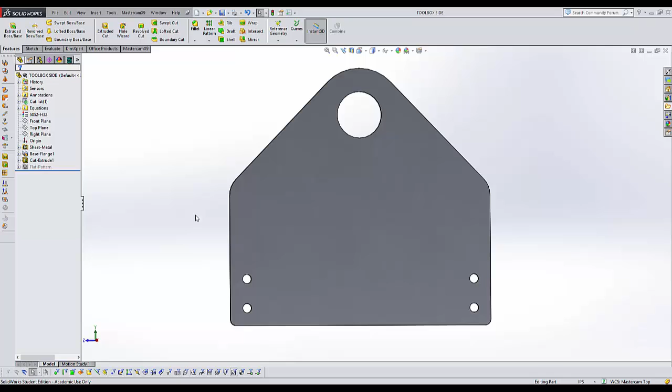Now that we're done with the side, let's begin the toolbox base. Let's start by choosing New, Part, OK.

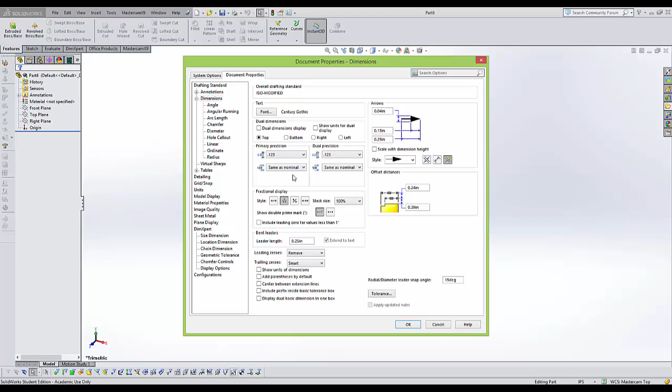We can set up our options, documents, dimensions, leading zeros - remove those. Primary precision, we want them to 3 decimal places. We want our linear dimensions to be in between. We want to make sure our units are set to inch pounds, and we'll hit OK there.

We're going to start doing sheet metal. We're going to choose the top plane, and we're going to create a rectangle. So far we learned how to create lines, arcs, and now we're doing the rectangle command.

We'll choose it off the center. We'll grab the origin, expand that. As you can see, as I use that one, it's already created some relationships - horizontal, horizontal, and vertical. We have an origin point that we're set up with, and everything is in the midpoint of that as well. We'll hit check for that.

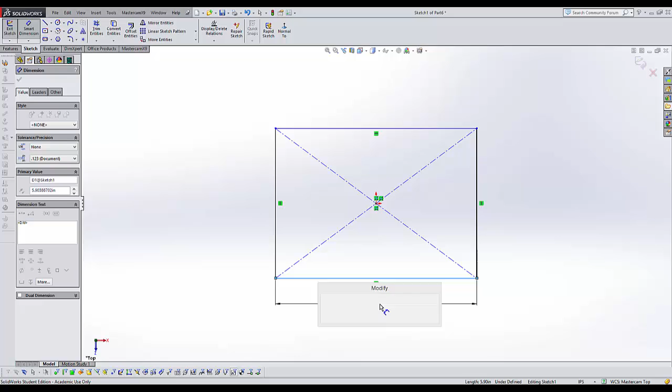Right mouse button click, go to our dimension, add our lower dimension of 9 inches, and our vertical dimension of 6 inches. When we exit the sketch...

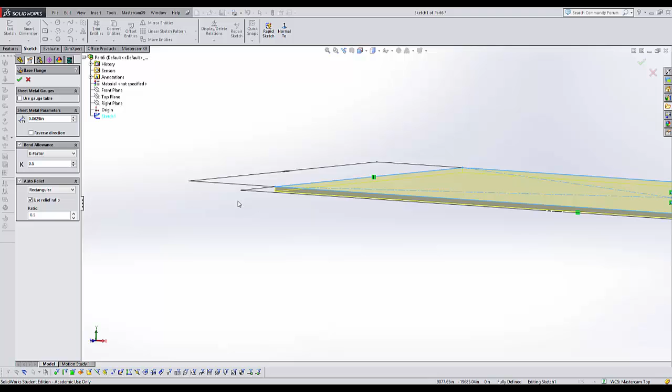...we will automatically go into the sheet metal base flange tab because that's what we chose. As you can see, the direction looks like it's going downward. That's a good thing - let's do that because that's the design intent we want. Check.

If I hit spacebar, we're still active. I can look at it from this view. Hit spacebar - I can choose isometric, dimetric, or trimetric. You choose what you want. I'll click off to turn off the sketches.

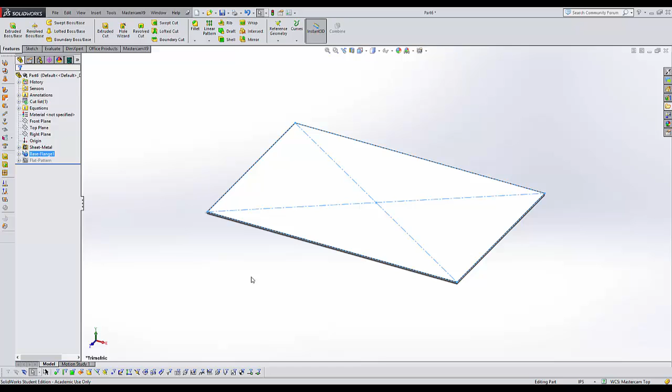Now we have our base flange, but we need to change our materials. Minimize steel, expand aluminum, and choose 5052 H32. We'll close that, and now you get the idea how you'll be flowing in the future.

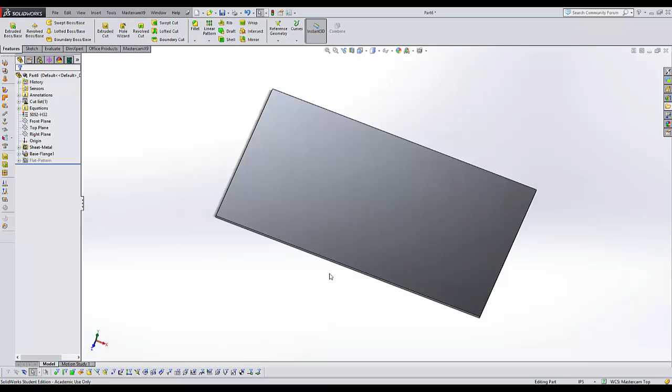This is our 4th drawing. We're to the point where we're understanding more of these tools and using them. As we practice more and draw more, we'll get a little faster. Okay, let's go ahead and save this part.

We'll call this Toolbox Base.

All right, let's do the flanges now. I'm going to put this in isometric. I'm going to come over here and look at what we have here in sheet metal. The basic thing that this project requires is to learn about edge flange.

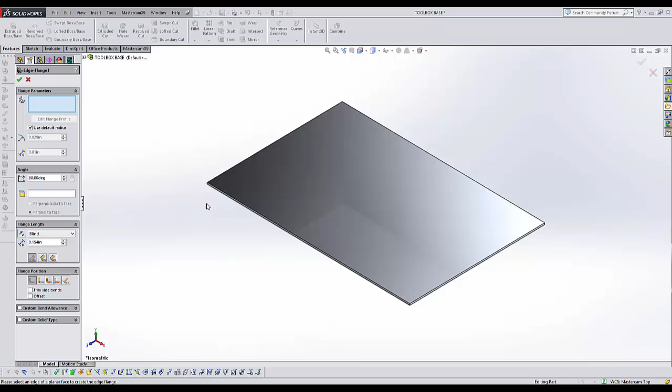So the first thing we want to do is select the edge flange command. We're going to choose this edge curve here and move up to a space, then snap and select the other one, and they'll be equal - so one actually drives them both. As you can see up and down on the screen, one actually drives it.

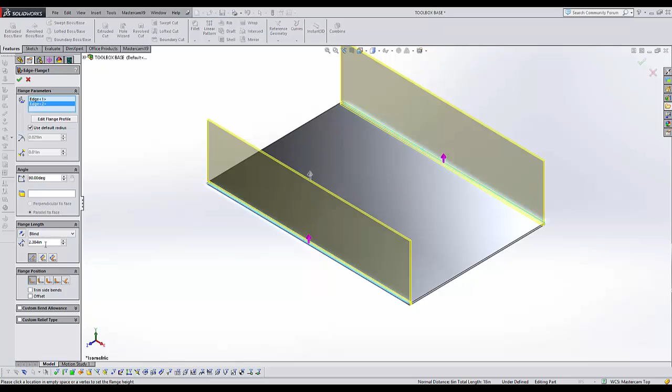We're going to give it a distance. Looking at the drawing, the distance says 1.5. So under the flange length, I'm going to highlight it and put in 1.5. They both move to that area. And the flange position - material inside...

...material outside, bend outside, bend from virtual sharp, and tangent to bend are all the different options of bending. At this point here...

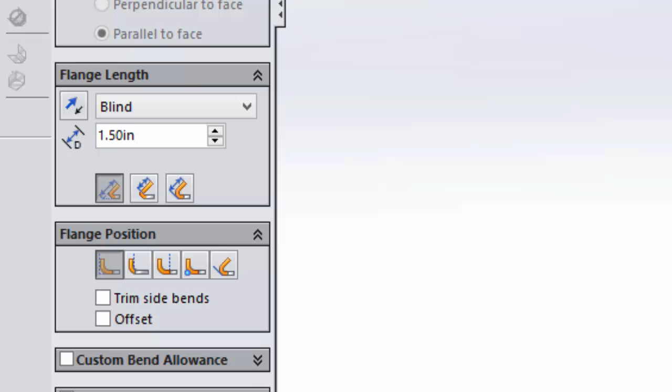I'm actually going to come into my view. I'm going to choose the right view and zoom in here. As you can see, the way it lays out my material when I flatten it out to cut it will be less material. As I go on, it'll be to the edge, and last will be outside.

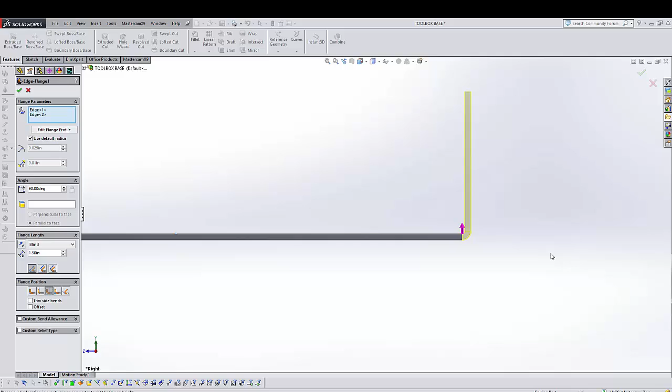So from this edge to the other edge is 6 inches, and that's what we want. So I'll rotate this way. I have my 1.5 flange position and the 2 edges that I chose. I'll choose OK on that, and now I have my 2 flanges for my base.

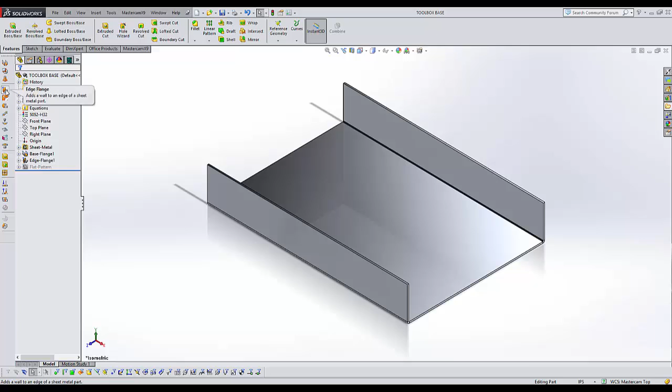Let's get started with the final flanges. Now we're going to do the edge flange command again. We're going to grab this edge, pull it - this edge, pull it out - this edge, let it snap out, and let it snap out the same distance. Looking at the drawing, it says that distance is 1 inch.

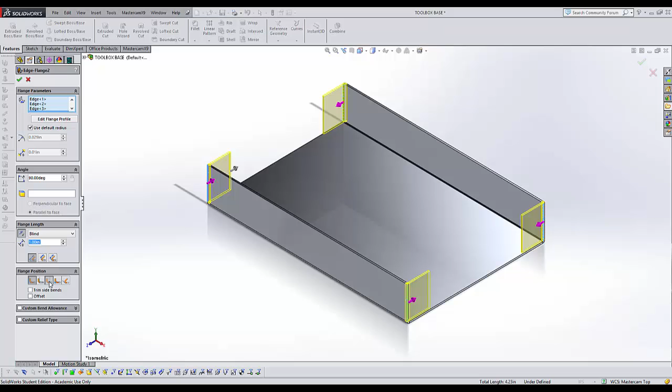So I will put that in there. I'll use the same flange outside option that I did for the first one. Simple as that, and we are done with all 4 sides. All we have to do is hit check. Now looking at this, this was pretty easy to do.

The flanges were easy to lay out by reading the dimensions. Now we have some small little fillets we want to add here. These fillets will be in the feature-based fillets, and we'll look over here and find fillets here. Our fillet design is supposed to say that those are all 0.125, an eighth of an inch.

Many times people don't know what an eighth of an inch looks like. They can put 1/8, and that is a calculator which gives you the same information.

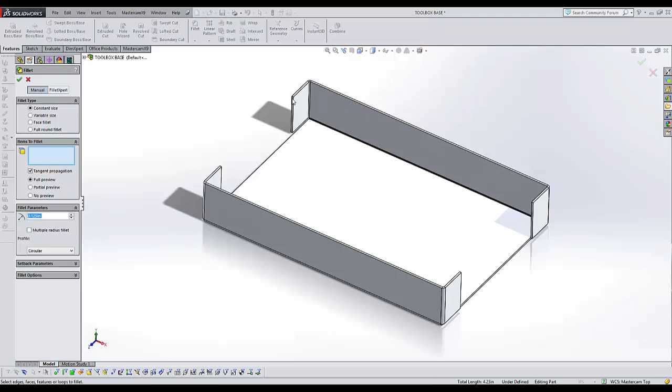So I'm going to use my middle mouse button rolling ball to select this edge. As you can see, it's giving me a preview - it has full preview on. I could do partial preview, or few or no preview. I like to see full preview, so I'll choose this one.

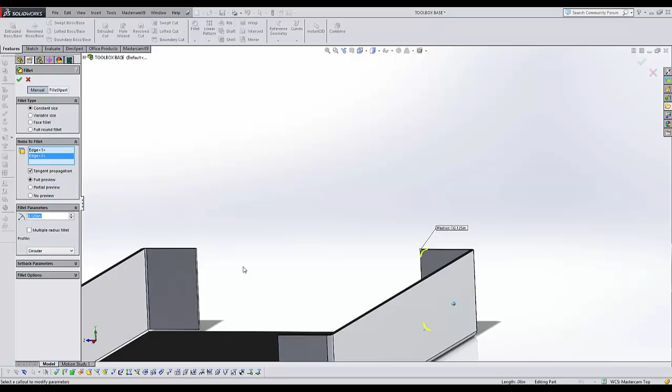Now I'm going to move away. What I'm using now is my 3Dconnexion mouse, and I think it's an outstanding tool for any solid modeling or three-dimensional modeling program. I use it all the time. This is the first time I'm using it in these lectures because not everybody has it, but you can see...

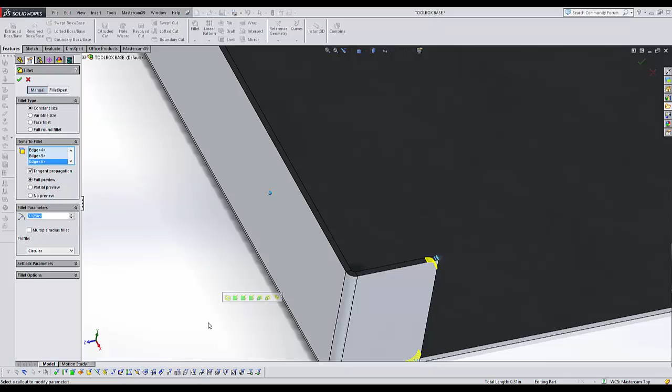...I can float this around, turn it up faster. I have total control just by grabbing a knob and turning it. You can look at it probably online at 3D Connexion, and you can see what they do for you as someone who's learning. There's my 8 edges.

I hit check, and now you can see I have my box, and it is done. I will save it and continue on with the assembly.

At this point, we have drawn every part that is needed for the toolbox.